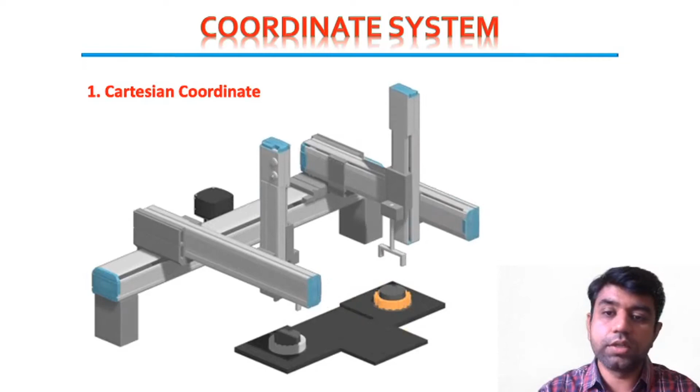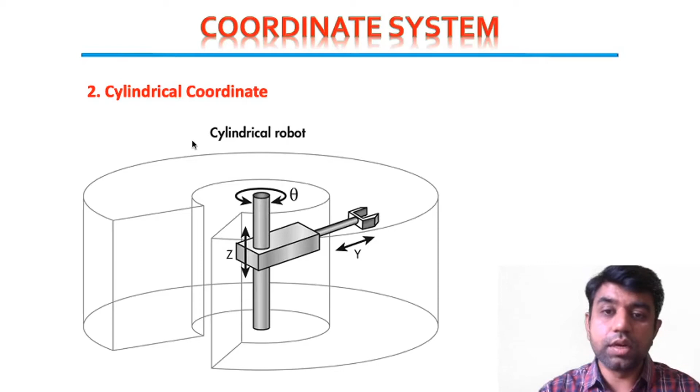The second one is where a robot can move in a cylindrical domain. For that, the end effector is radially moved, as well as it can traverse up and down. If these two motions and a third circular motion are combined together, then the work envelope would be cylindrical.

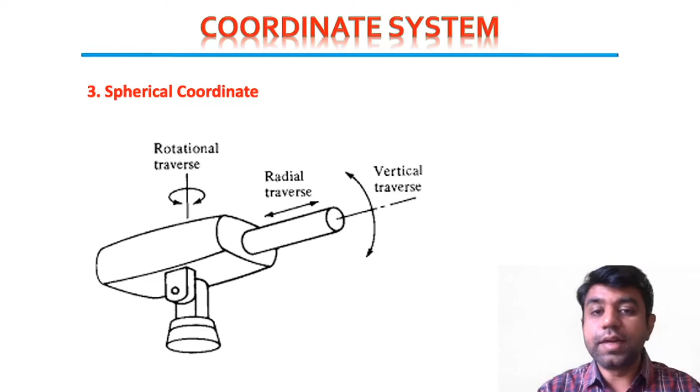So that is called the cylindrical coordinate system. The third one is a spherical coordinate system, in which we have three basic motions: the radial traverse as well as the vertical up and down motion. Apart from that, we can have a rotary traverse, which forms a complete sphere. If that application is required, we need to go for the spherical coordinate system.

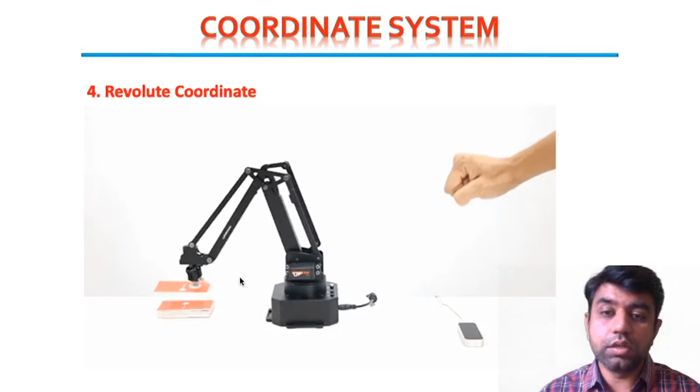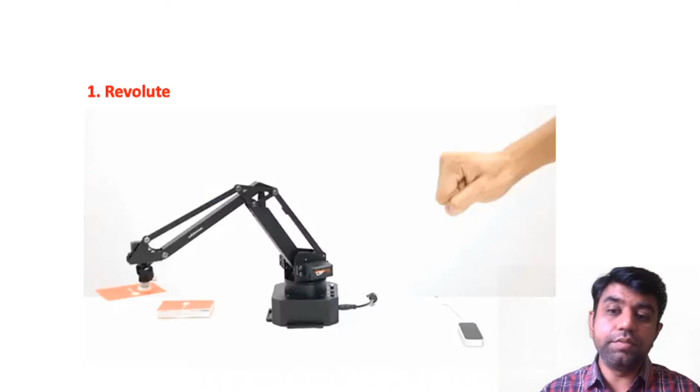Let's understand in detail about that. Whenever we are using these two arms, it is also categorized as articulated configuration or jointed arm configuration. In that category, the first one is revolute, that I had recently explained. We have these two basic manipulators, and in between we have kinematic linkages. As you provide motion to that, it will form a different domain or work envelope.

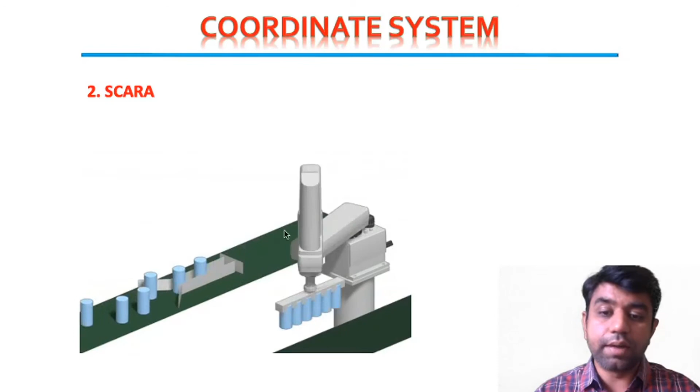The second one is SCARA, which stands for Selective Compliance Assembly Robot Arm. This is normally used to pick and place objects. If some object is coming from the front line, it will pick that up and deliver it to another line. For that, we have two articulated arms, as you see, with first and second linkages in between. So the assembly formed like this is called a Selective Compliance Assembly Robot Arm. It is widely used in most industries nowadays.

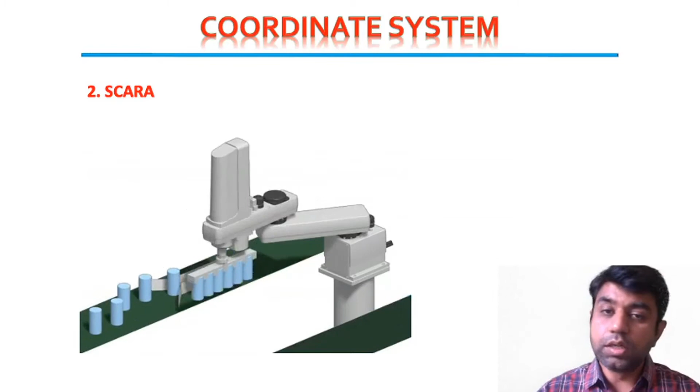Now let us understand the computer vision system. This computer vision system is part of a non-contact type of sensor. We will have image acquisition, processing of that, and based on that it will generate a specific output by developing statistical analysis.

In order to capture the image, we are using cameras. From the software we can do pre-treatment, segmentation, and feature extraction. So from the image of the particular component itself, this kind of system can be useful to find out quality checks, whether there is some defect or not in the particular finished part. So some of the things can be evaluated, and it can be segregated if found defective, taken apart.

So it is useful in order to find out this kind of things from the workpiece, to check the length, width, area, perimeter, to check the shape, to check the color, or even the combination of any of them.

We are using this kind of computer vision system. So robot technology can also be useful in order to find out the quality of the component.

Coming to the application part of the robot, it can be widely used in the case of agricultural industry, automobile industry, construction industry, entertainment industry. In the case of healthcare also nowadays it is extensively under research work, that is in the case of hospitals, patient care, surgery. In the case of law enforcement, for surveillance and patrol purpose.

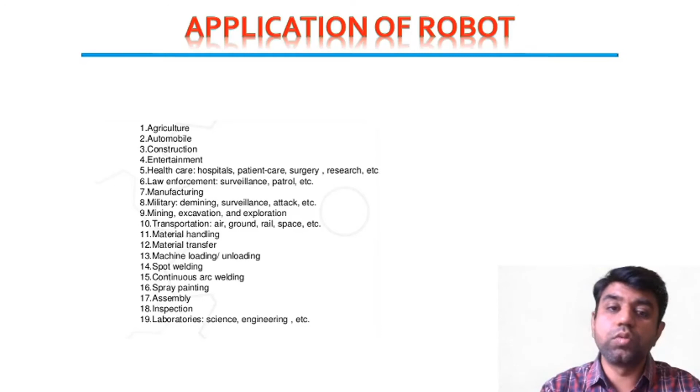If you are aware, in the science city of Ahmedabad, a number of robots have arrived just for this last category, that is to understand science and engineering. So that's having a wide application of the robot.

Coming to the specification of the robot, this is required to understand just for the identification of the particular robot, how to identify it. These are the normal specifications mentioned in the case of robot: which joint has been used, which kind of end effector is used, how many degrees of freedom are there.

What is the configuration, that is about the manipulator you are using, then the space or the particular area it can cover, that is the workspace or work envelope, then the level of accuracy and precision you are getting, the speed at which it is working, and the payload capacity, meaning if it is used for lifting purpose, how much force it can transmit. So these are the normal specifications given in the case of a robot.

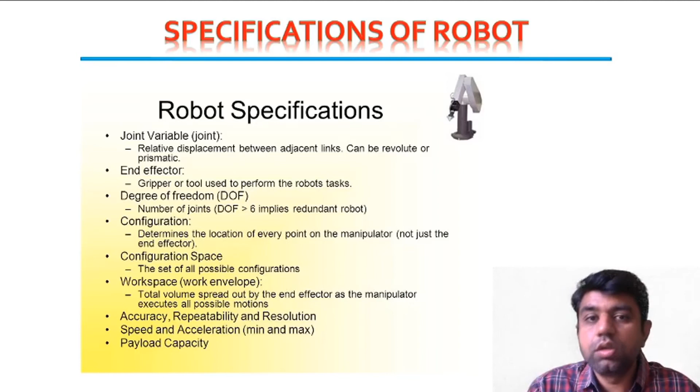Finally, if we summarize the entire chapter of robot technology, we come to know that we are having different laws about robots, different generations in the case of robot, and then we understand about the different anatomy, the different elements we use in the case of robot.

Then we go into the depth, how many different types of end effectors are there, how many different types of drives we can use, which are the different varieties of sensors which can be mounted on the robot. Now this specification actually covers all the different things which we had learned. Based on the application, we need to select the different components, and that has been specified under the specification of the robot.

Apart from that, we already learned about the different configurations, meaning in what particular work envelope the robot can work. Based on that, you need to select the particular kinematics, and based on the kinematics, you need to select specific drives. So that's all about the different particular functions of the robot.

But apart from that, we are having one more thing in robotics to learn, that is cost analysis. If we are using workers, at what particular time will we achieve the break-even point if we use the robot instead? We need to pay wages to the laborers on a regular basis, but in the case of the robot, we just need to pay the electrical bill, and the robot can do the task of at least 4 to 5 people. So that is actually the economic analysis of the robot, but that's just a theoretical topic, so I'm just covering it in brief right now.

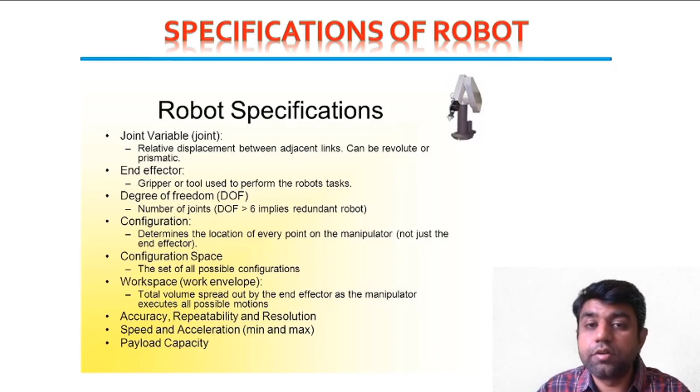Apart from that, whenever testing of the robot is happening, we need to be very specific about that. We need to have proper fencing so that it cannot harm the outer environment. So those are the number of things taken care of whenever we are doing testing on the robot. So that's all about the entire topic of robot technology and our today's lecture.